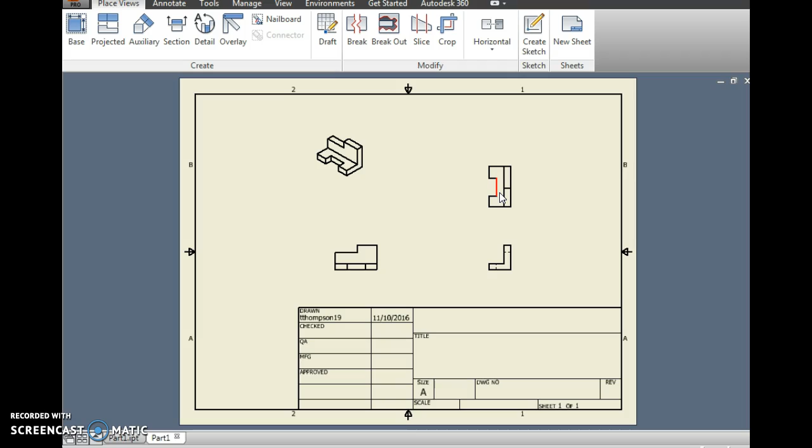So if I go back to Inventor, you can see how it's a little bit different orientation. The views are all the same for the orthographic projection, but they're not quite in the right orientation. I have an idea of how to fix that, and we're going to try and do it together for part 2. So first, let's look at part 2. Let's go back to our document here.

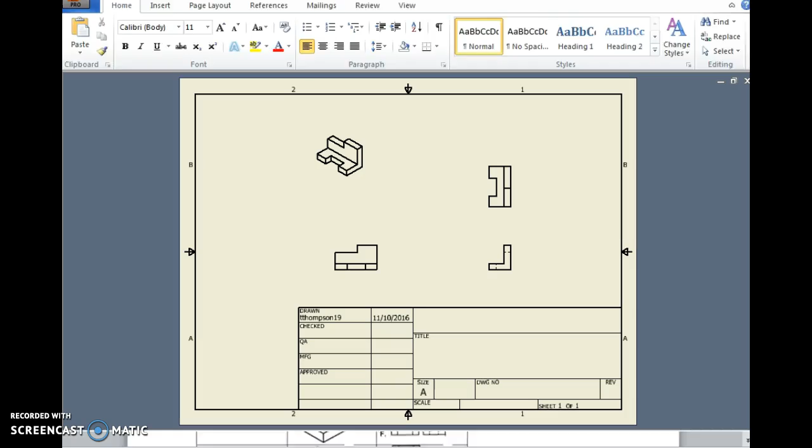This one looks pretty simple because it just has this cutout down here. It's still shaped like an L like part 1, but there's nothing taken out of this top edge. So I think I can knock this one out pretty quick, and then we're going to change it into a working drawing. So let's go to Inventor, and let's go to New, Standard IPT, Create. Click on the pencil, click on the front plane, let's go to our Line tool, and let's make our L for our right side view.

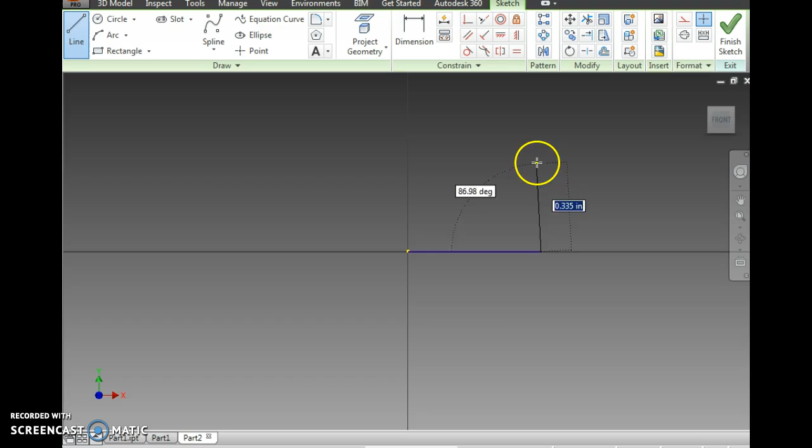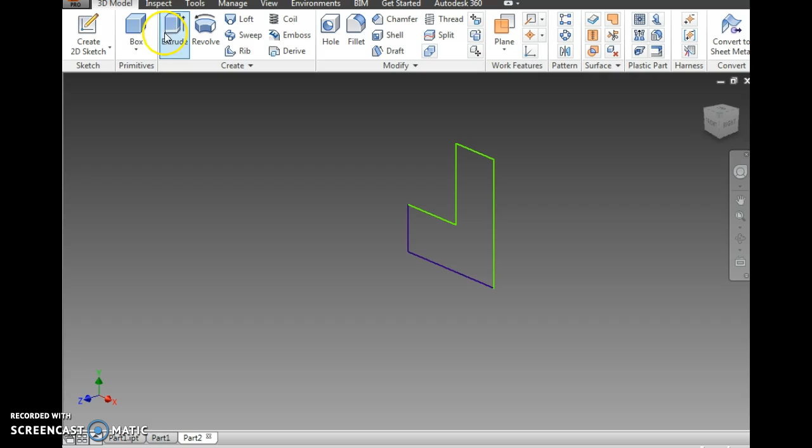Again, we are free drawing these. We aren't using any specified dimensions. We're just getting used to taking an isometric view and converting it to an orthographic. Let's go Finish Sketch, Extrude. In this example, I think my 1 inch is maybe not real proportional. I'm going to make that 0.8. I like that a lot better.

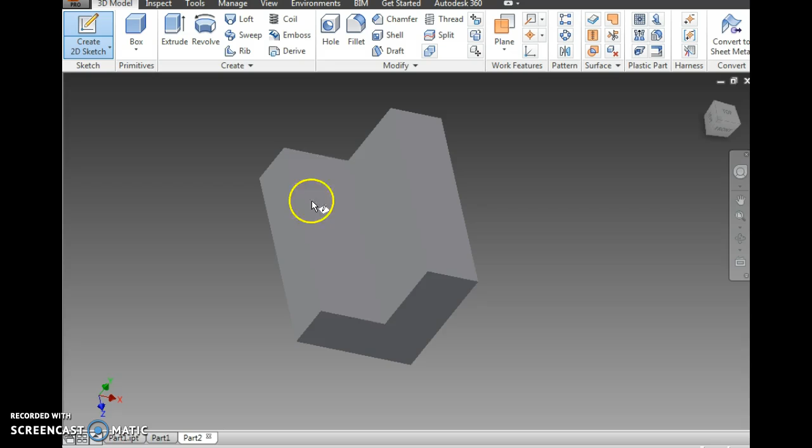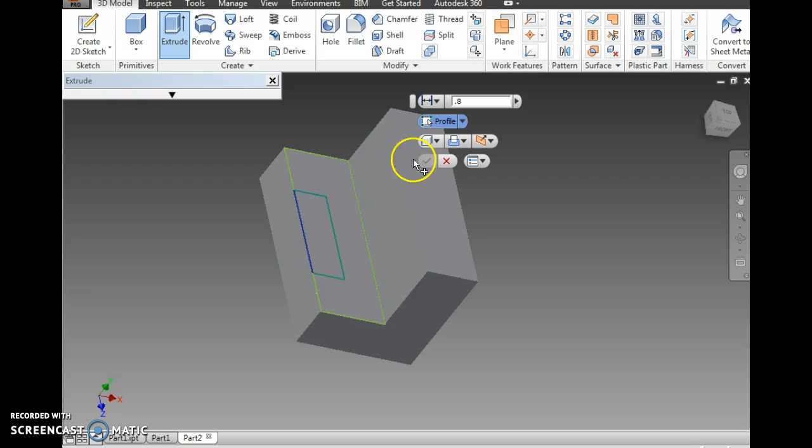And then I need to make that cutout in this area right here where my cursor is. So I'm going to go Pencil. I'm going to click on this area right here. I'm going to go Rectangle. Make that rectangle about in that area. Looks good. I'm going to go Finish Sketch. I'm going to go Extrude. I'm going to switch this to Cut. I'm going to cut that section right there, and I'm going to check it.

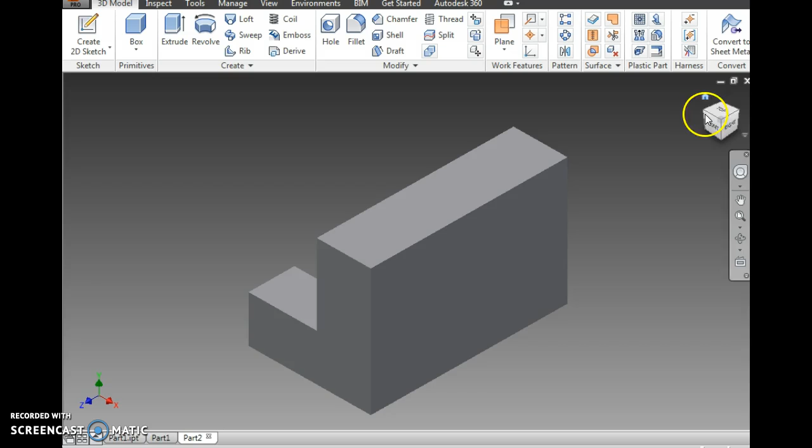Now, before I change this into a working drawing, let's look at our orientation. I have this as our top, which is not how we see our top views in our document. If we go over to our document here, the top views are at 90 degrees to that. So we're going to change our view orientation before we turn this into a working drawing. I'm going to click on my left side. My left side, this is what I really want to be my front view. So I'm going to change left to front.

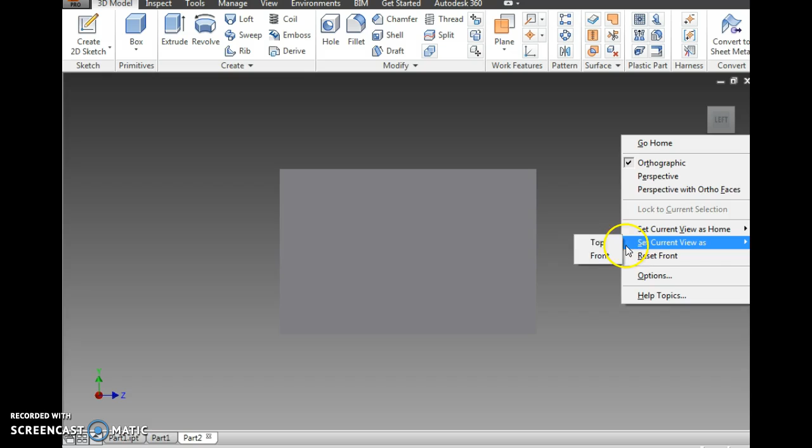I have this little area here next to the view cube. Let me click off of that again. Here's our view cube. We're used to a little house on the view cube. There's this little arrow to the lower right. It's called a context menu. I'm going to click on that, and I'm going to change my current view to front. All right, here's our front view. That means this is now our top view. I like that a lot better.

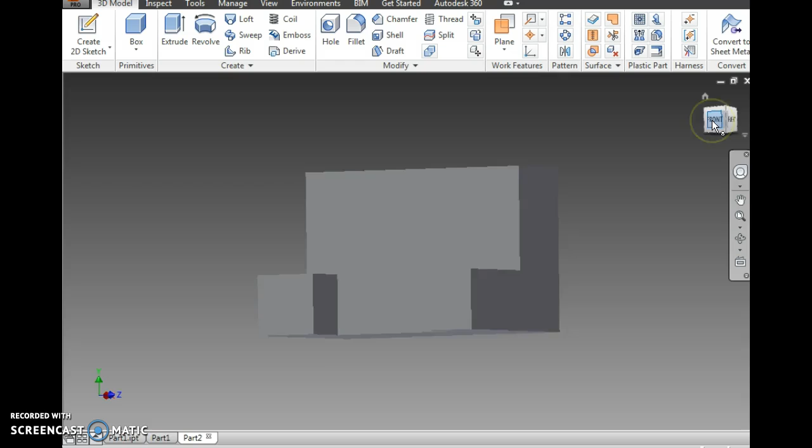One of the rules in orthographic projection is that your front view is going to be your most descriptive view. And when we change this into a working drawing, you should see that. Another rule is the front view should have the least amount of hidden lines. And I think we'll see that when we make our conversion as well.

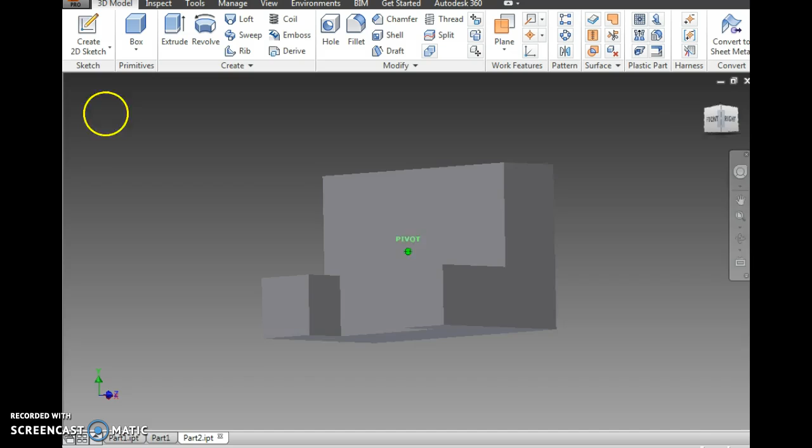So first I'm going to save this as part 2. Save as part 2. I'm going to make sure it's just part 2 and not part 2 IPT. So I'm going to go Save. I'm going to overwrite, so I'm going to make some new files. And so let's check this. There's right. There's front. So let's convert this to a working drawing. Let's go New. Let's go Standard IDW.

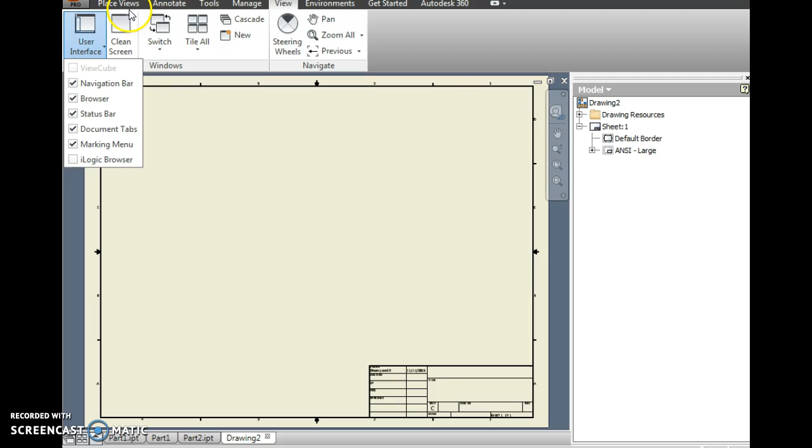Create. All right, I need to open my browser menu because I want to change sheet size. Sheet size defaults to a sheet size C, so I'm going to change that. I'm going to go to View, User Interface, turn Browser on. Then I'm going to click back on the Place Views tab. Over here, I'm going to right-click on Sheet, Edit Sheet. We're going to make that A. That changes it to height 8.5, width 11 in landscape. Okay, here's my username, here's today's date.

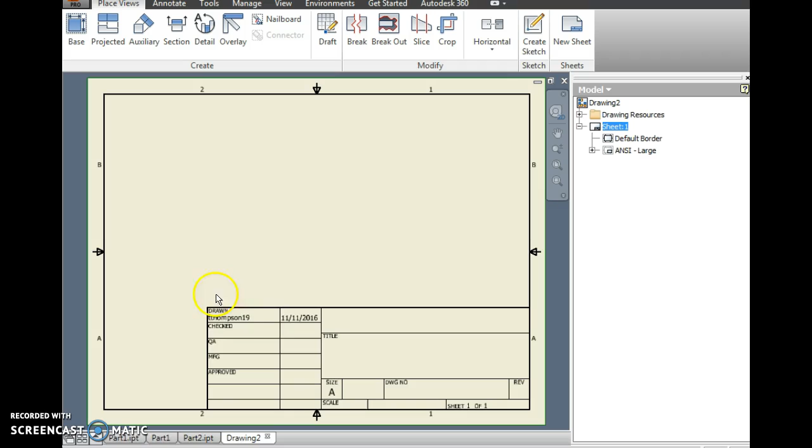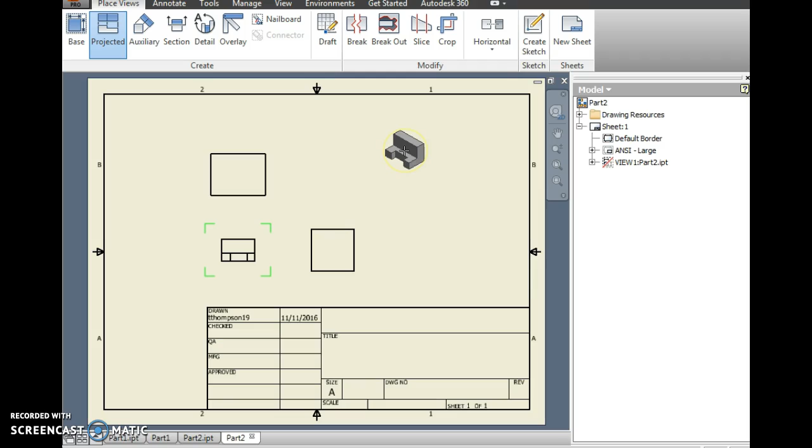We're going to project a base view. Click on base. There we go, there's our front view. Going to go up here, here's our top view. This is doing exactly what I wanted it to do. Here's our right side view. Up here, we're going to click a fourth time. Then we're going to go right-click, create. All right, so here's the object we made as a 3D model.

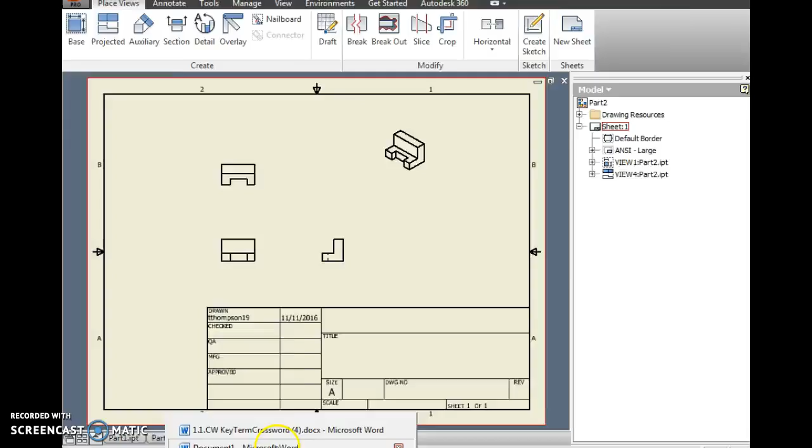Let's see what letter goes with number 2. Look at our view here, look at our front view and our top view. Let's go to our document and see which one matches that. It looks like it's going to be letter A. Letter A has the same orientation as what our working drawing has. So problem 2 is going to be letter A.

Well, I hope you found this video useful. I hope you're understanding more about orthographic projection and isometrics. I also hope that you're understanding more about creating working drawings in Autodesk Inventor.